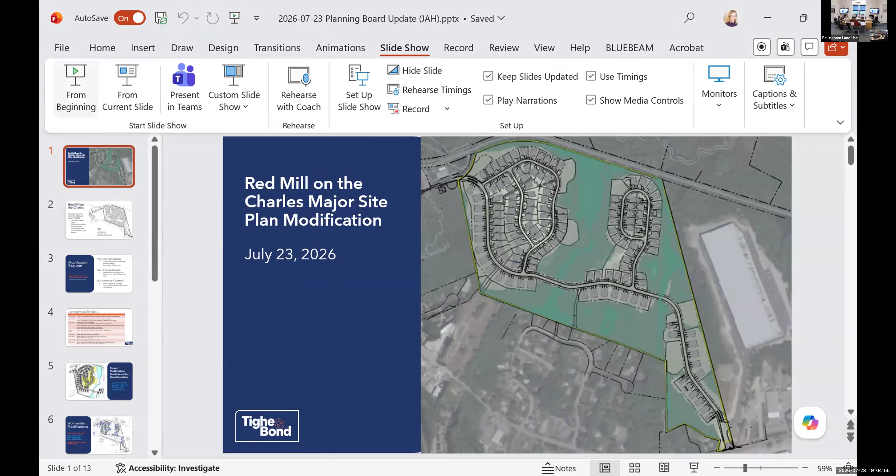As Jeff mentioned, we're just going to do an update on where we've been and how this process has started. This is the Red Mill on the Charles. It's a major site plan modification. The project was initially approved back in 2021. Since then, Toll Brothers has become involved, and to accommodate their preferred home products as well as modify the construction schedule, we've worked through a few requests on the conditions as well as some tweaks to the layout.

The permit was approved back in September of 2021. The project is for 105 single-family homes, 66 townhomes on 85.6 acres. The site has frontage on Mechanic Street, Route 140, and Mill Street. Currently it is an active gravel yard. In this portion, right around here, there is active earth removal going on. The project will preserve about 45% of the total property as open space. Those are the areas shaded in gray, totaling about 38.4 acres.

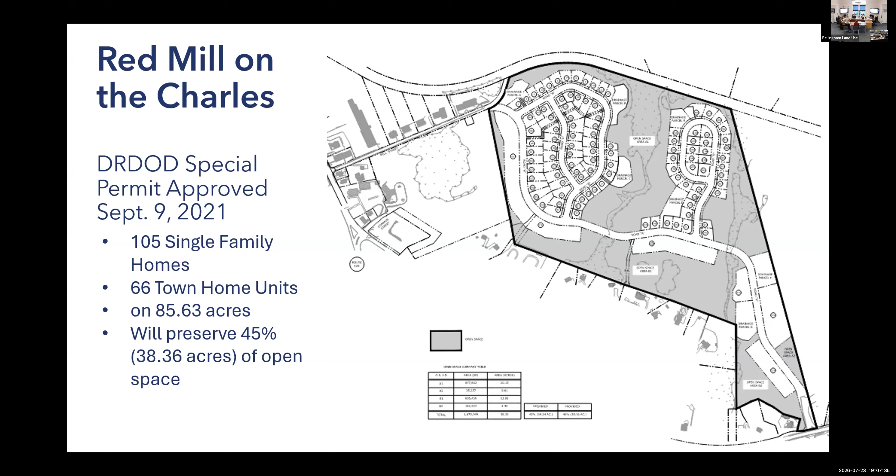So, modification requests. We initially came to the board back in February, discussed if we were going down a minor or major path. We voluntarily opted for the major path after meeting, and submitted our application in March of this year. Our modifications include a lot reconfiguration and a little bit of roadway alignment on two of the roads, adjustments to the stormwater management system, and then permit amendments related to phasing and occupancy, as well as the garage facade placements. We obtained a ZBA variance back in February.

This allowed the project to convert from having triplexes in those combined parcels to duplexes. It was just the way the regulations were written - triplexes were allowed and duplexes were not, so we got a waiver on that. And then we also got relief on front and side setbacks related to those townhomes.

Now, this is just a timeline of what we've been doing since November. We started meeting with the previous town planner and assistant town manager to discuss our potential permitting paths in November.

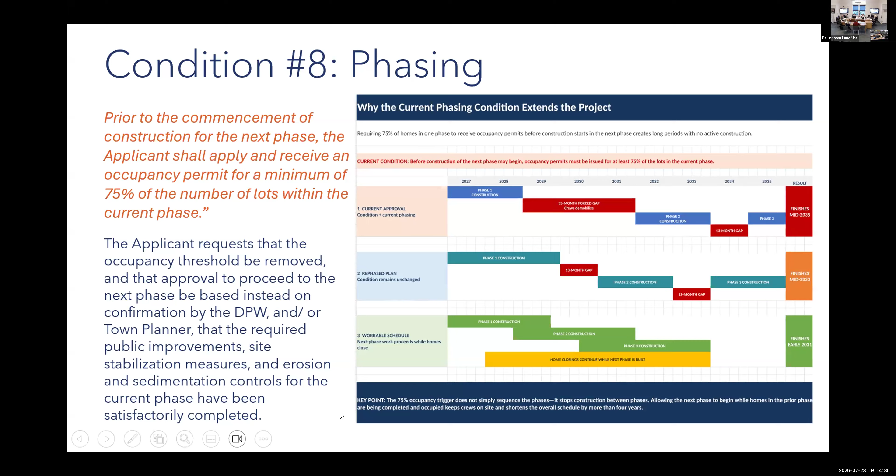If I can expand upon that a little bit—if you could bring up the spreadsheet that we submitted, that's the backup for this chart. So there's 2 different home types here: there's duplexes and there's single family homes.

What we're looking at here is the lag on either home type, because there are two different markets. Just because we have duplexes available to sell doesn't mean everybody who was going to buy a single family home is now going to buy a duplex. It's two different markets, two different price points. While we have duplexes for sale, single family home sales may be completely stalled. That's where you see this significant pause in that long red line - there were no single family homes being sold at that point. We could only be selling duplexes.

That's based upon the current phasing plan and the current condition as it's written. When we met last May, we had offered a different phasing plan. If we kept the conditions the same but followed that phasing plan, we would still see a one year gap between phase 1 and phase 2. So what this does, really, is what Liz was saying - everybody would demobilize, we wouldn't be able to sell or construct homes for about a year, and our entire construction team would need to leave, demobilize, and then come back onto the site later.

What ends up happening essentially is when you look at this gap schedule... I don't know, let me zoom in a little bit.

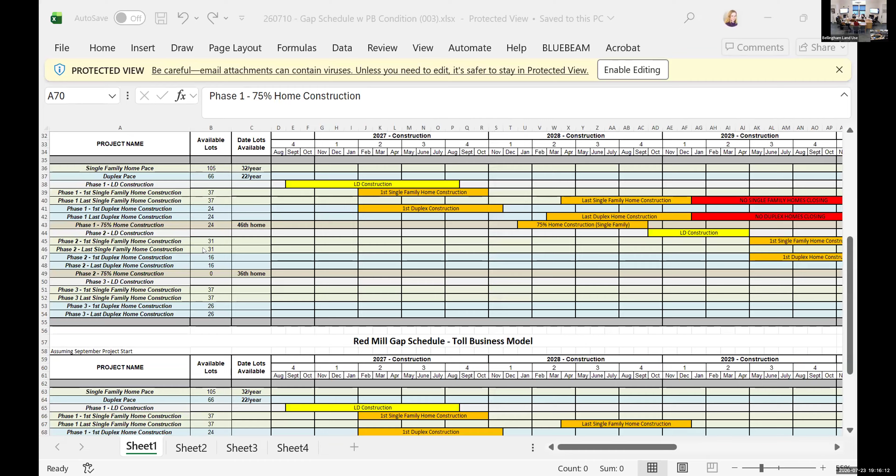What happens when we look at this gap schedule - under the current condition, if we were able to sell at what we would expect our pace to be, we would be finishing in mid-2035. Even with the revised phasing, if the condition remained as it is, we would be finishing in mid-2033. So that's the genesis of the request to modify this condition.

We can get into the details of this further if you'd like, but I wanted to point out what we were looking at in modifying the condition would move us down to that third phase, where we would be able to finish in early 2031 at the pace we would like to move forward at.

It sounded like there were concerns based upon other subdivisions in town. I wanted to walk through a little bit of the protections the town already has built into the permit, that we think provide the board some assurances that we're not going to disappear, that we do need to finish lots, and we do need to take care of drainage.

If you could flip these slides, sorry to jump back. It's testing the strength of our... sorry, okay, we need some stress tests every once in a while. I'll get back to these. Here we go - this one? Hang on, it's gonna get there. Here we go.

As it stands today, there are six conditions already in the special permit that has been granted, which we think provide the board with a lot of protections. At any point you can come out onto the site and submit a stop work order. There's a lot of control you already have built into these permits that have been granted.

But I wanted to step one further, if you can go to the next slide - there's also a bond being held by the town, and I understand there's always concern about being able to access that bond. What I'm suggesting is we come up with some sort of deposit that goes into the planning board's account. I used $50,000 as the starting point for that conversation, so that if we aren't acting in your interests and you have concerns, we have 7 days to rectify whatever has gone wrong, and you have access to this cash to do whatever it is to rectify the problem.

The reason this is such a big deal to us is we can't move forward with the project under the current condition - it doesn't work. Just because of the gaps, we can't operate that way. So I'm trying to find a way for us to move forward with a modification to that condition, and we can settle on a larger number if that makes sense. If this isn't used, we don't think it'll be needed - that's why we think it's reasonable to suggest this as an additional condition added to the special permit.

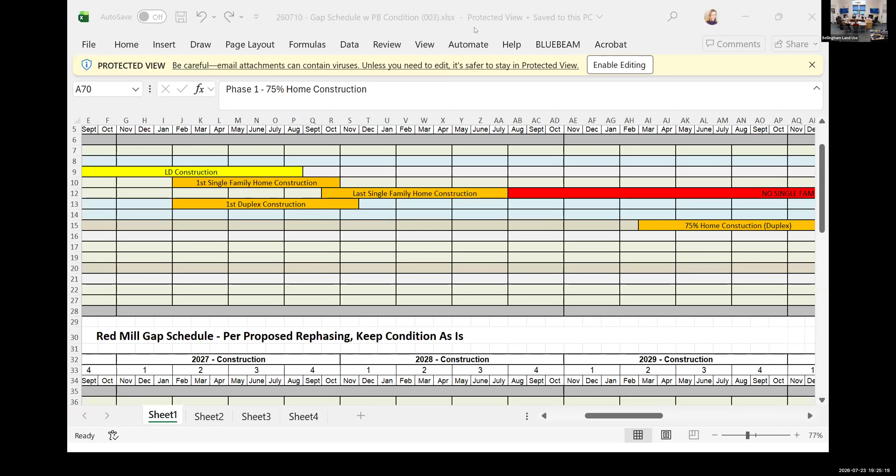You're building it and then you've got marketing time - is that what the downtime really is? So this is why we're waiting for the owner to move in. If you build 10 and start selling those 10, you get to the point where your phases - you're building up the phase, you're selling them off as you build them. So I'm missing why there's that large period of time where there's no building happening.

So if you use your 10 as the example. What was going to happen is we sell 10, and then we are building them. And now we have no sales going on. We have to wait, because we need that

75% occupancy. We need that 7th unit occupied. Now that we've got that, well, 8th, we need that 8th unit occupied. Once that 8th unit is now occupied, I can come back out, I can now start selling again, and I can remobilize everybody and start building that next home. But for a period of time, it takes a year to build a home.

A year, 14 months, depending on the home itself. We've got a year, so I'm building all 10 homes, even if I were able to sell all 10 at the same time and start construction on all 10 at the same time. Once I'm sold out of this phase, I have to wait till the 8th one is occupied and has a CO. So now I've waited that year before I can start my sales on my next one. So that's why all that downtime occurs.

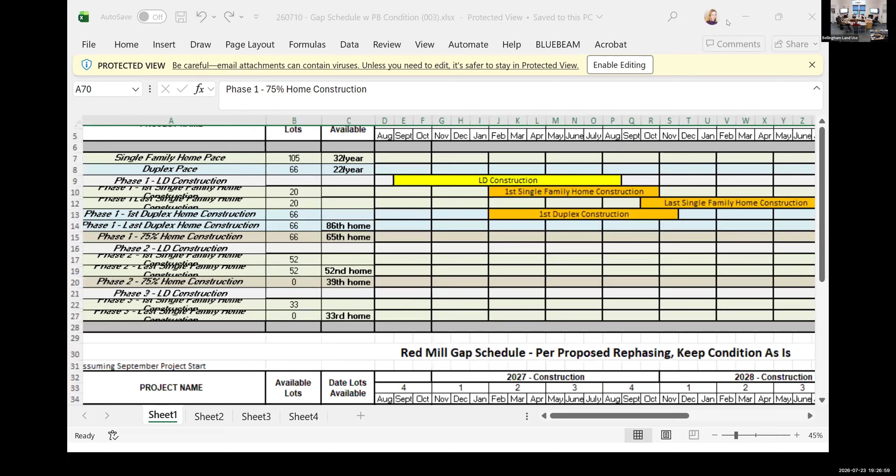No, based upon the phase, if you zoom in, in each phase the top portion is the single-family homes, the lower portion is the duplexes. That's why that very long red line is there - that's when the single-family homes, we have no single-family homes that can be sold because all the duplexes are in that phase. So it just creates this long duration where we have to wait till we've sold and constructed 66 duplexes.

And once the 75% is occupied, then we'll be able to start selling the next single-family home. Do you need additional phases to get that 75%? That would make it longer.

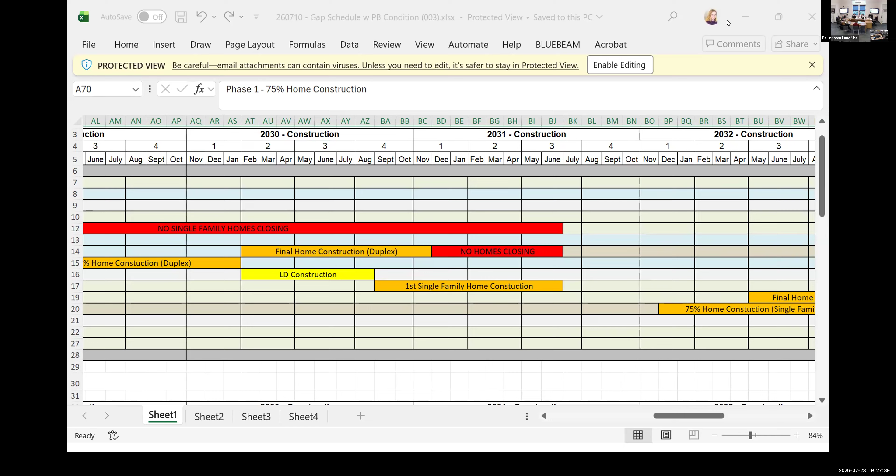So can I ask - maybe you know Phil better than I - based on what they're proposing, what would be the reason why we wouldn't allow something like that? Because at the end of the day, this is going to shorten the whole project. So there's pluses and minuses, and given that the entire project can be shortened by doing what they're proposing, what's the downside of letting them do that? Because I don't know what the downside is.

The downside is if we run into problems, the town doesn't have enough teeth to actually enforce what it needs to enforce. $50,000, like you were suggesting, is - were you just throwing that number out? Even if it was, what's the average selling price of one of your houses? What does that have to do with it? We're talking about teeth in the process - you have a stop work order.

Also, I guess, why - within your subdivision regulations there's a calculation for coming to a surety. So that's still in place, correct. This is just $50,000 that the town can easily access outside of that. The concern that was expressed to us was that we didn't want you to move into the next phase because somebody may be living there in the first phase, where stormwater management may not be fully completed, there may be a stockpile left behind, trash may be blowing around. These were the concerns, and that's where the $50,000 comes in.

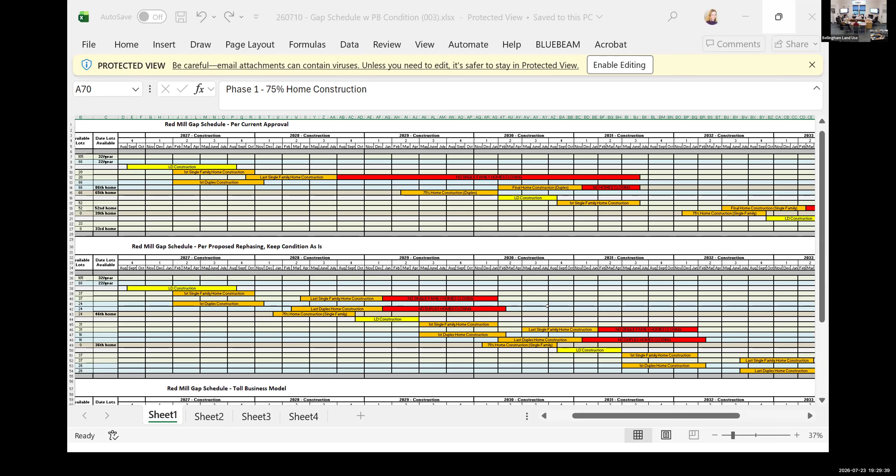The idea is, the concerns were that we weren't doing our job protecting the homeowners that have moved in. So what could be going wrong out there that we need to have repaired? And this cash would be used to mitigate any issues with the homeowners there - is that what you're saying? Correct.

Yes, and if we had to mitigate any issues and we use that cash, then what? We can be required to replenish the account as needed.

I'd like to hear from the Inspectional Services director, I believe we've got a new director there who would be in charge of monitoring this project. We're not gonna make a decision tonight on this, and I'd like to hear them weigh in.

Is the phasing as originally proposed beneficial for the town or not? I want to know if this is something that we can do, something we can even consider. Okay, thank you for the question.

So in previous communities that I've worked in, we've had peer review services to sort of be like a clerk of the works, to oversee, be that special project manager for that project.

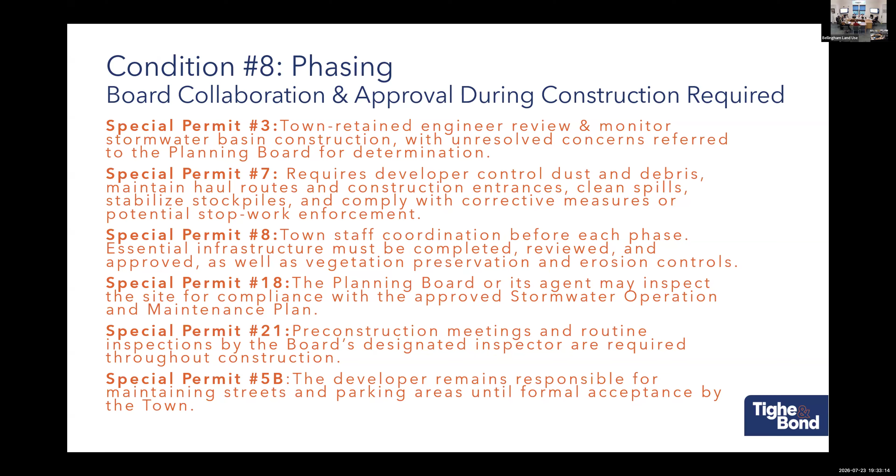Because of the way the phasing is set up with the single family and the duplexes, and you mentioned the roadways are gonna be 100% before you even do your first phase. We would do the roadways at the beginning, that's correct. So that's almost phase 1, roadways and drainage. Yeah, so what we've done is we've included those roadways as part of the first phase, that's what's in gray.

Which you never see, that's the benefit of being Toll Brothers. Oh, okay. We're here for the whole job. So it makes sense for us to build it out. Yeah, that's usually the thing I see, you see them where they stop and you're like, oh interesting, they may just leave. So that's one thing I noticed when I was looking at it, it's not something I've usually seen. Kudos to you on that.

Just remind me, what were the second and third colors? The green was the second phase and the blue was the third.

So then what's the next step, Marty or Phil, on moving forward looking at this the way that they're proposing? For me, I'd be in favor of working with them to do what they're proposing because it shortens the cycle of getting everything done, and they seem to be wanting to work in good faith. To Rachel's point, they're doing the roadway as the first phase, which indicates they have every intent to build out everything. So I'd like to see us find a way to make this work rather than a way not to make it work.

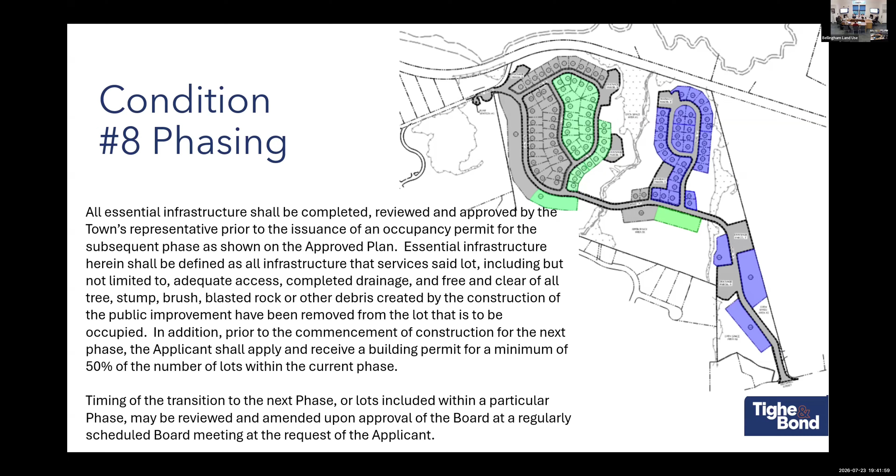Would anyone want further conditions on the $50,000? I know that's above and beyond already, but when you're working on something this large, $50,000 can go very quickly. I understand there's a bond, but we could condition it so that it has to be replenished. Yeah, that's almost kind of what I'm thinking. Yep, that's fine.

We want to move on to the garages, the cookie cutter issue. The idea from the prior board, the former vice chair, was looking to have more character in the neighborhood. It was basically to say, if all the garages are lined up, there's not as much character. That was the philosophy.

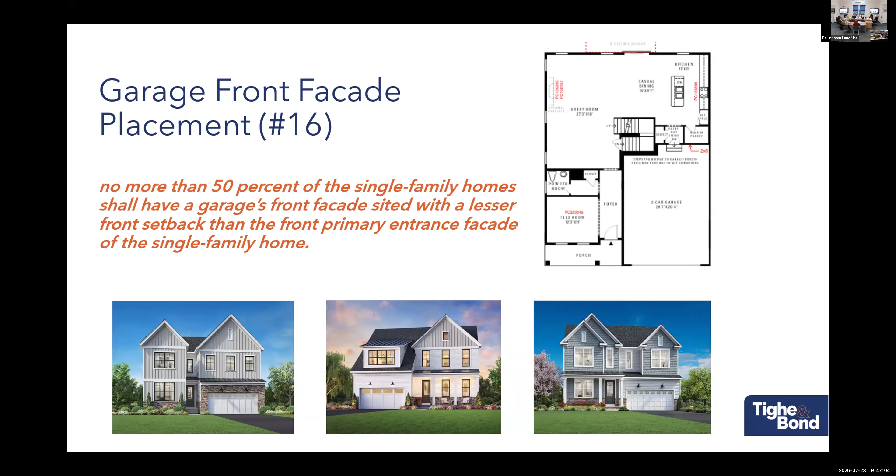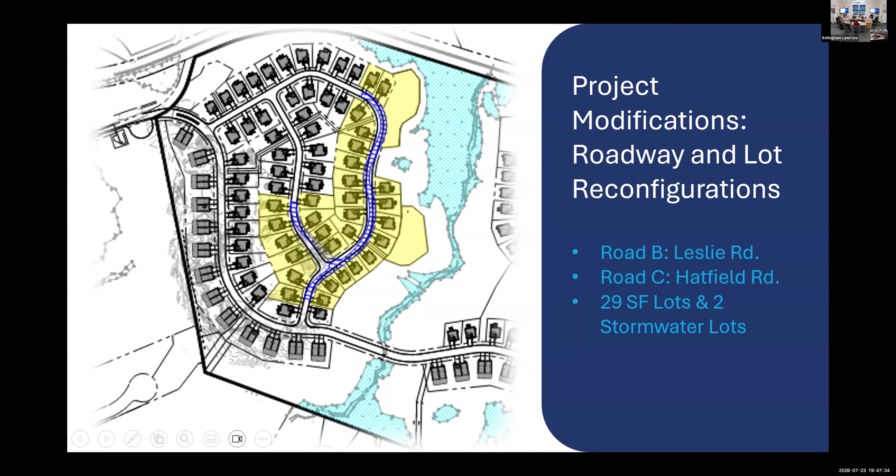Is there anything left to present? I was gonna ask if we wanted to go through stormwater or the lot modification. We do have Beals and Thomas, Tom Micklack, here who reviewed this. Why don't we do a peer review for stormwater? I know you guys have been going back and forth. Can we pull up the letters? I certainly don't have it memorized.

I'm going to be familiar with the stormwater then. Yeah, she's bringing it up over there. Right now. The letter from July 15th.

So we have done, this is our second round, our second iteration, so a lot of comments have been closed out or are now deferred to the board.

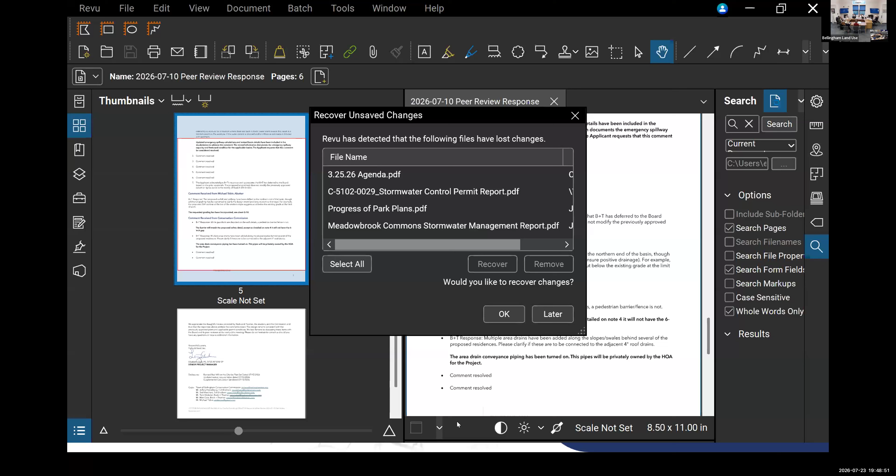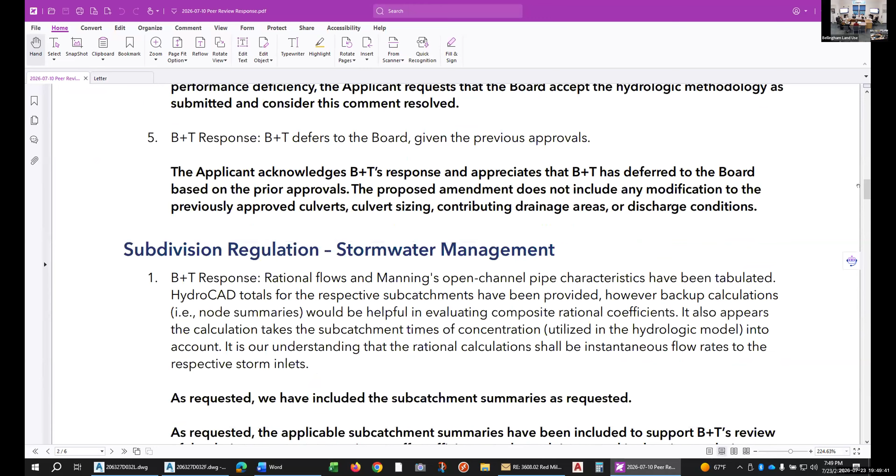Um, be frozen, apologies. I don't know, Tom, if you would have more success sharing. Sure, I can share. You want me to share the letter with you, the responses? Yeah, I think that would be helpful. Okay, I'll stop. I don't know if everybody can see that. Yeah, yeah, that went quick. Way faster than my hotspot, so thank you. You're welcome.

So yeah, to Liz's point, this is our first supplemental peer review. We have gone back and forth, and to that end, a lot of the comments have been addressed. So you'll see here, you can see comment resolved. I don't know if we need to go point by point necessarily, but there are a lot of items.

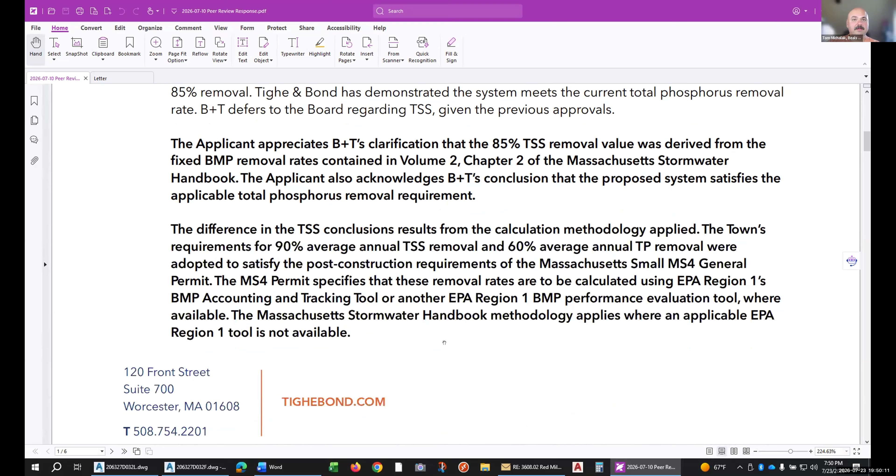There's a handful of items too that Beals and Thomas, we made the initial comment, reviewing things against the current procedural rules and stormwater regulations, and regulations that weren't necessarily in effect at the time of the original approval. And Tighe & Bond responded accordingly. So there are comments here where we basically deferred back to the board, basically saying, making the comment just for the record that, okay, the current standard is this, though we acknowledge that the approval back in 2021 might not have been subject to the same regulation.

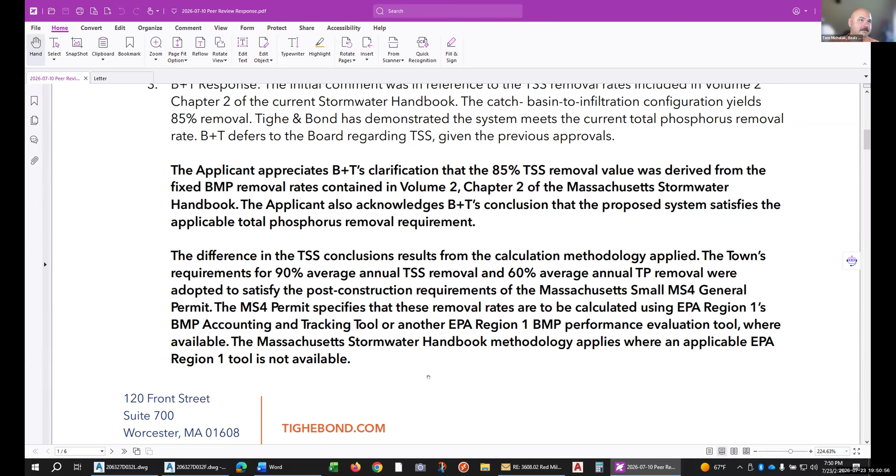There are a couple of items that were still hanging out there, and Tighe & Bond, we appreciate that they responded and provided their rationale for these things. One of them was this right here with the TSS, knowing that the town has a regulation for 90% removal. We basically made the comment that it was only 85 based on the handbook and the stormwater spreadsheets, or the BMP spreadsheets.

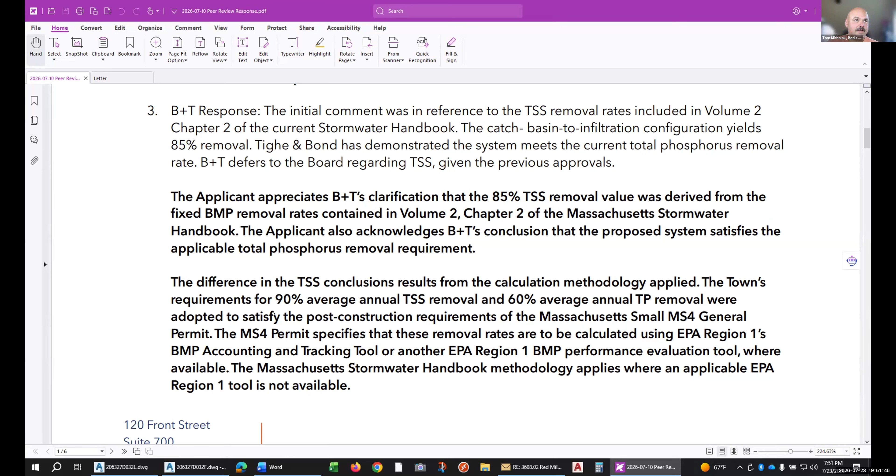But yeah, certainly with the MS4 permit, and given that the town regulation is written through that lens, and the forthcoming stormwater handbook or management policy will also have these regulations, we basically agree with the utilization of these BMP accounting and tracking tools for the TSS. So I think this one right here, number 3, that's effectively addressed.

There are a couple other ones here, and just to go back, let me see here. Yeah, so these are ones that we deferred back to the board on, and Tighe & Bond basically just providing their rationale.

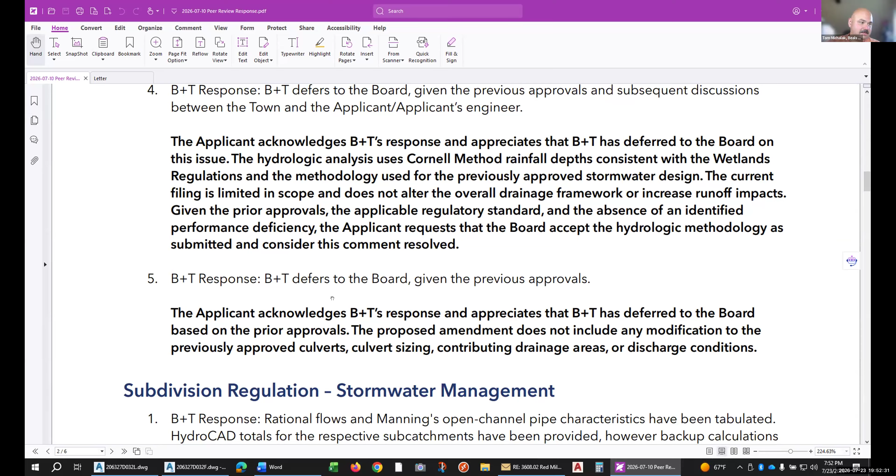The culvert sizing, this is another instance where we made a comment on something that we weren't involved in the initial review, but we made the comment without really acknowledging that these things weren't changing. So that was effectively Tighe & Bond's response there.

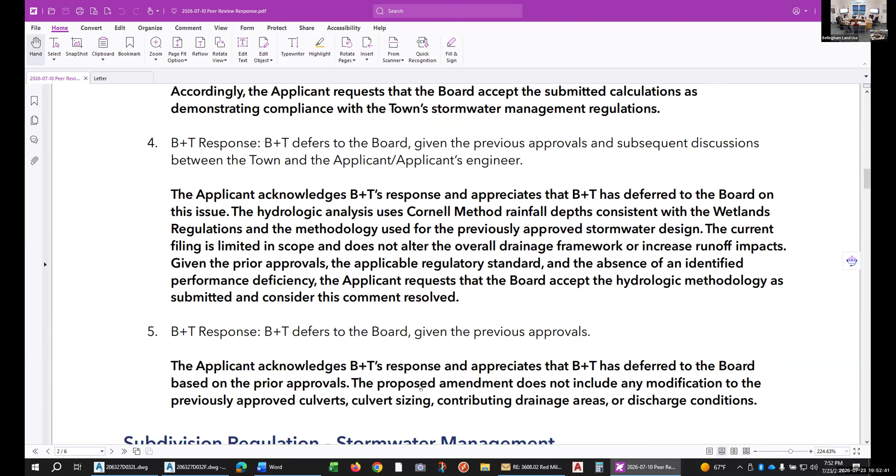Was that based upon the MS4 changes that went into place? Is that a lot of these, or is that? Yeah, I mean, I think the new regulation is a higher standard than was originally approved. Is that correct? That's correct. And we're changing the stormwater methodology right now. Is it, so why would we not enforce the new regulations? We meet them. Well, meet them.

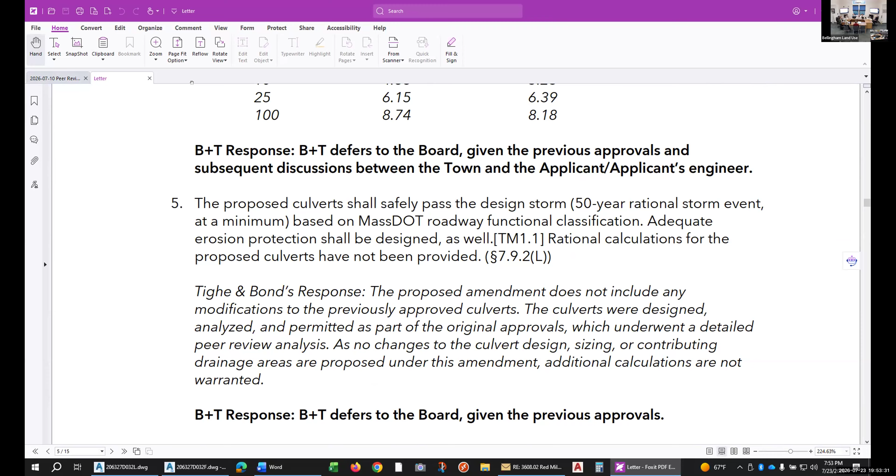Yes, so the new regulations from MS4, it's really focused on treatment, right? MS4 is focused on making sure that we're fixing a broken system. Stormwater was initially designed hundreds of years ago, 100 years ago or so, where we just thought about it as flooding, right? Get the water away. Now we're seeing in the 303D list, which is issued by DEP and tracks the quality of our waters, that stormwater is one of the leading pollutants in the state and the only one we're seeing growing. So the MS4 permit is stepping in and saying you now need to treat.

It's coming out with this 90% TSS removal calculation and then the 60% total phosphorus, and we do meet both of those. The differential that Tom was talking about before is that the 2008 stormwater handbook assigns pollutant removal just per stormwater control measure, meaning if you have an infiltration basin, you get 80% and that's it.

The EPA has since released pollutant removal curves to support the MS4 and the communities implementing the bylaws to apply. It acknowledges that an infiltration basin getting 0.2 inches of treatment achieves less pollutant removal than one getting 2 to 3 inches of infiltration volume. So we applied the current curves issued by the EPA, which have also been acknowledged by DEP and will be in the Resilience 1.0 package, the updated stormwater handbook, when it finally comes out. Per DEP's update just last week, it should be by the end of the year, but it's an election year, so we will see.

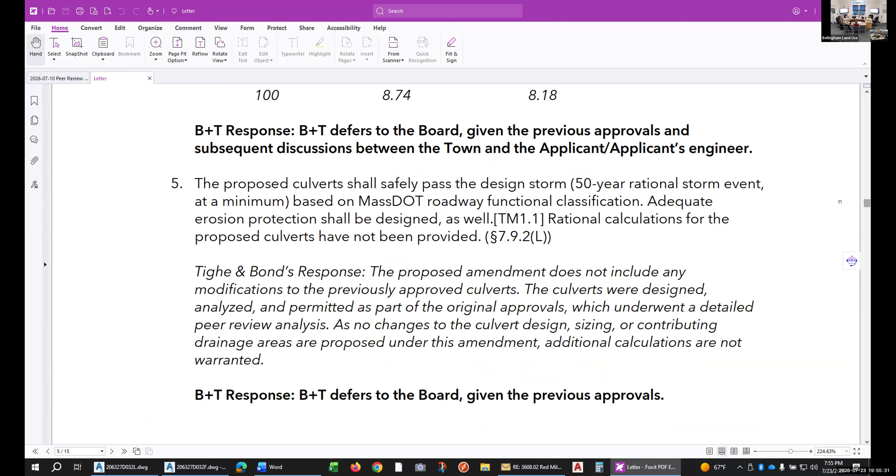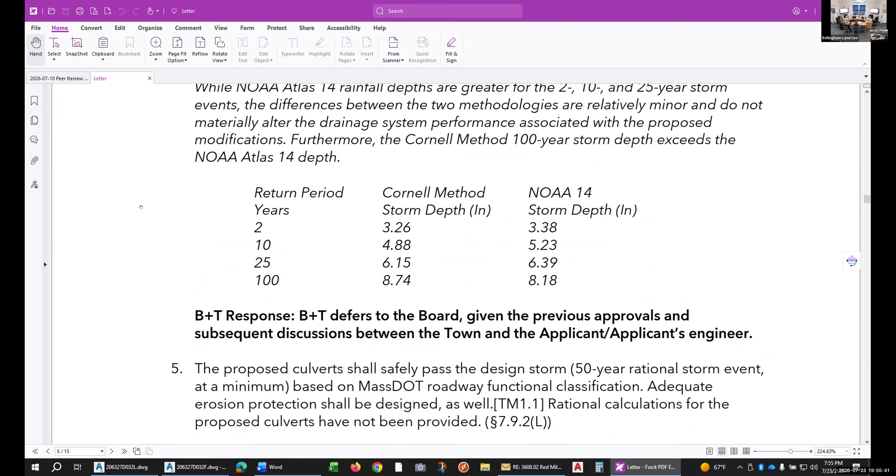So we're at 90% TSS and 60% phosphorus. The only place we ask for relief is that we did not change the storm depths used to design the system. That table, just off the page there, shows the 8.74 and the 8.18. The town regulations defer back to what is called the Cornell method.

We used to think the Cornell method was the best and most available, but it's really only based on about 80 years of data. NOAA is based on over 100 years and has federal funding to be continuously updated, so once every 10 years we'll see an update to NOAA Atlas 14. It's now considered the standard that everyone points back to.

So we are detaining more in the 100-year. It's like a 0.1 inch difference on the 2-year, so it's kind of inconsistently all over the place, I'd say. But we are detaining more on the 100-year and around the same on the 2-year. I think those are two big driving factors, given that 90% of storms in Massachusetts are 0.8 inches or less. And then the 100-year would be like a forward-facing storm where we're now actually above and beyond the average depth NOAA is claiming, more into that climate-change-ready scenario.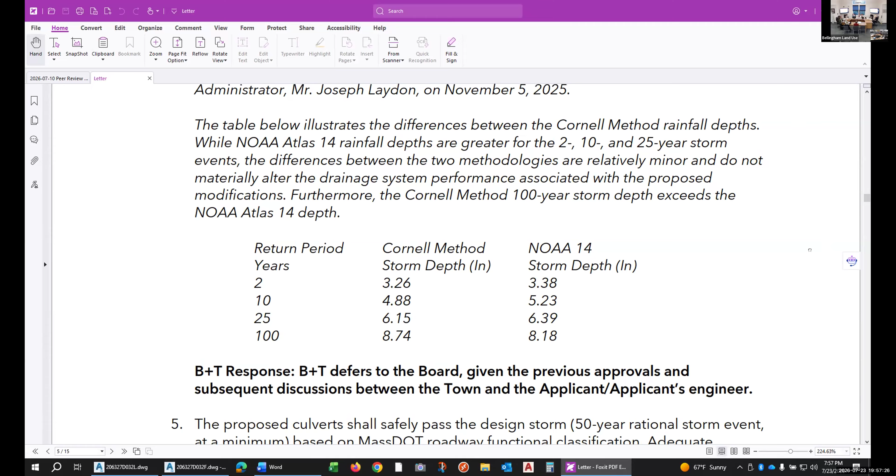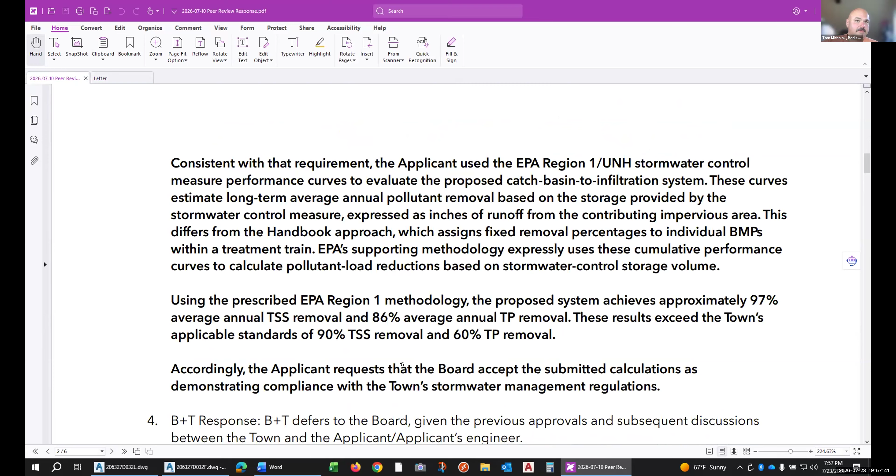Tom, I didn't mean to cut you off. No, that's quite all right, and I appreciate the background there, Liz, in context.

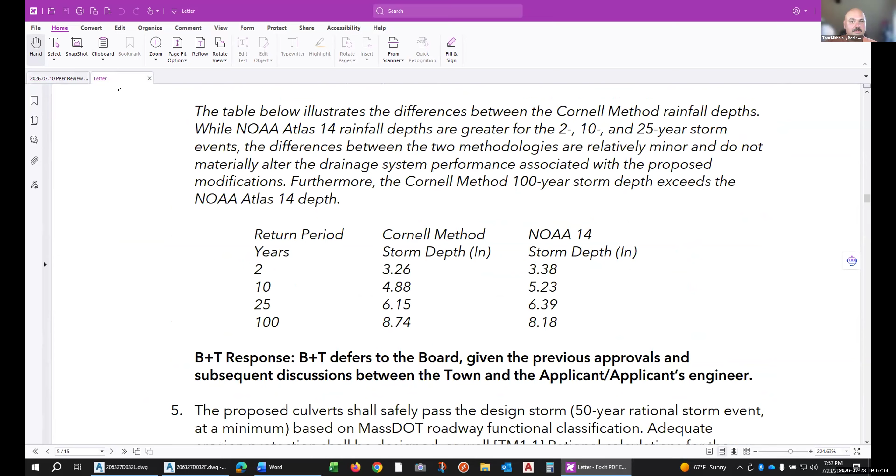But that was certainly one of the other comments we made there as far as storm depths. I think the one regarding the culverts, we didn't see rational calculations for those, and my disclaimer here is we haven't dove into the most recent set of resubmission docs that Tighe & Bond sent over. We've exhausted our supplemental peer review, so to wrap things up, we'll be looking for additional services.

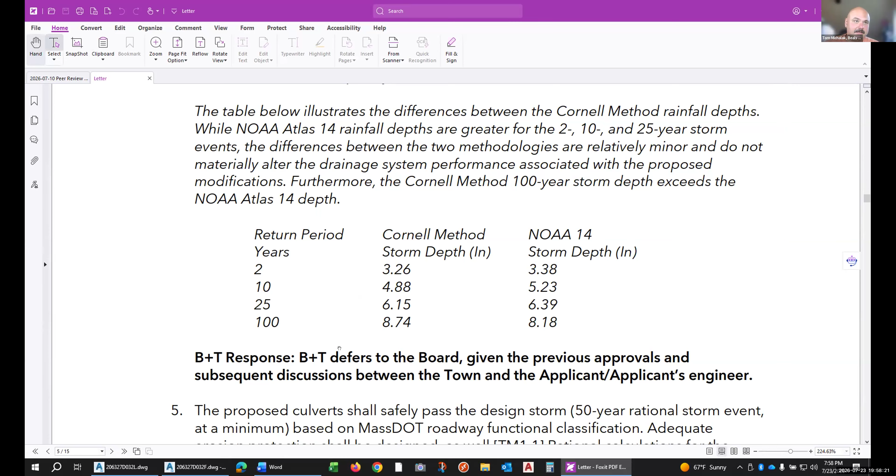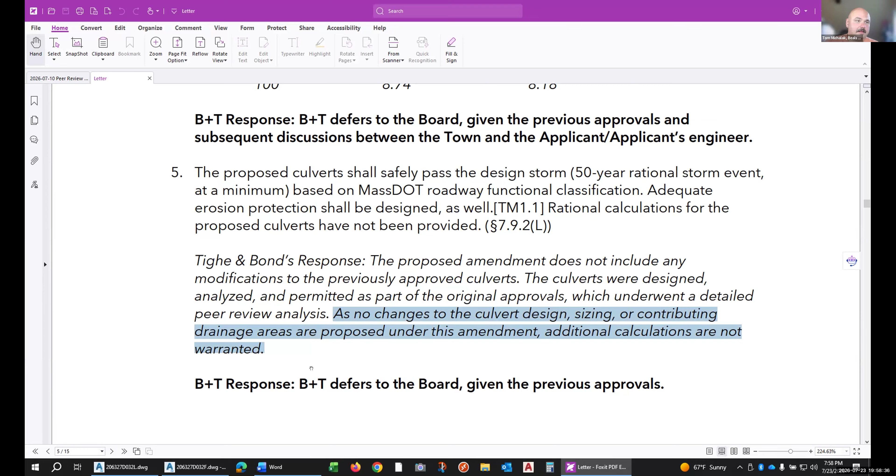Once we get into that, we'll be able to vet out all these other items. But to that end, this is one here where we asked for the rational calcs, and I think Tighe & Bond's response was that nothing had changed from the previous approval, so additional calcs weren't warranted. I don't know that they were included, but that's something we can sort out.

Rational flows. Yeah, and there's a comment here about utilizing HydroCAD for the rational calcs. That's just something we were more accustomed to seeing as a very simplified calculation for the rational calcs.

HydroCAD, and Liz, we can talk offline about some of this, but partly some of my questions from the last set of calcs we reviewed was that there are some subcatchments not generating any runoff in the HydroCAD rational calculation, understanding it's pervious areas potentially directed to culverts or area drains, whatever it is. I was just trying to reconcile that with what we're generally accustomed to seeing, which is that instantaneous rate of runoff, which can understandably be conservative, but is the industry standard for a lot of these things, especially storm sewers in the roadway where it's all pavement.

So, I know that just given a cursory look at the info you guys resubmitted, there's an updated calculation in there, or additional info that I requested. I can't remember if it was the HydroCAD summaries, but that's something we can take a closer look at and coordinate on.

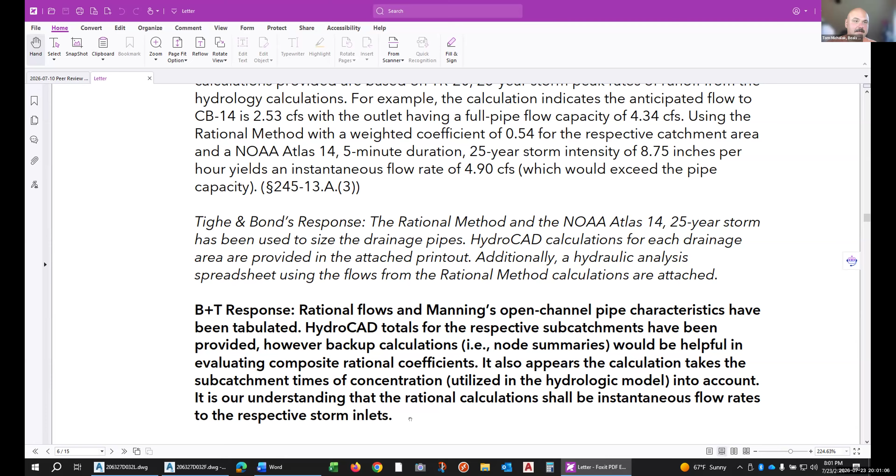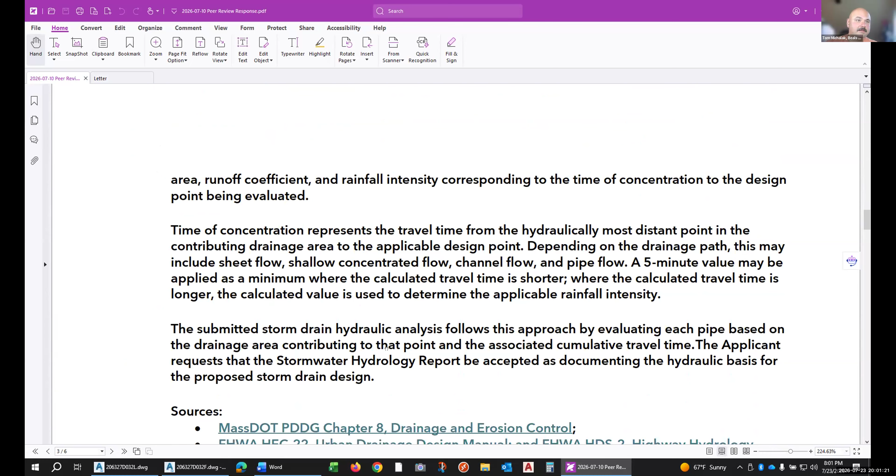I think a lot of these other ones, and this is our letter, but apologies to switch back and forth, I don't want to confuse everybody, but back to the Tighe & Bond letter. This is a response to that hydraulic discussion I just talked about.

It looks like this was another comment we had about the basin grading, understanding there was a waiver previously granted, but at this specific basin we felt it was worthwhile to at least make the comment, given the application of those slopes. It appears Tighe & Bond addressed that, and we can check that out as we get into the second supplemental review.

This is another one that we deferred to the board on. Can't remember the exact comment, but...

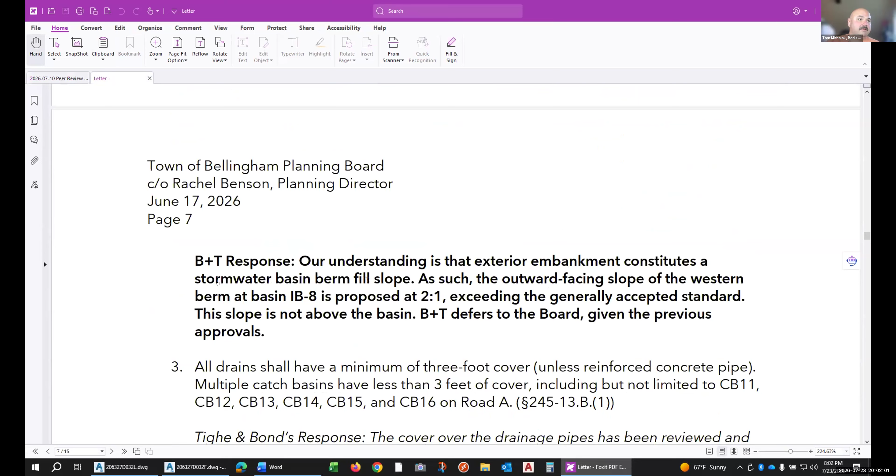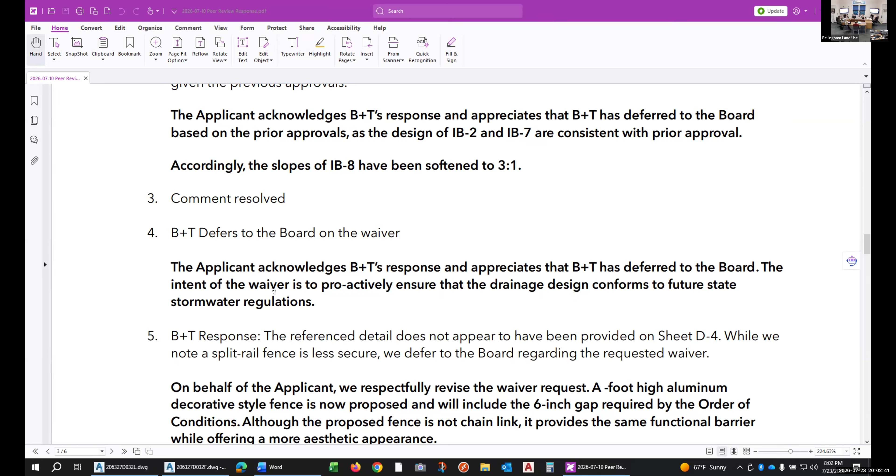Well, the fence might be worth updating you guys on. So we had submitted a waiver to do a split rail fence around the basins. Heard the feedback that you guys weren't comfortable with that and didn't think it would meet the safety requirements that the regulation is trying to put in. So we are still requesting a waiver, but it's just because we're not doing chain link. We're going to do a solid slat fence, just because it's a little more aesthetically pleasing. And we do have the required 6-inch gap at the bottom because the Conservation Commission does want to allow critters to be able to go through.

So I think we're much more on the same track where this will provide that safety requirement that the board was looking for. Do you have pictures? It's in the plan set, but I need to find it. Towards the back on the detail sheets, but what number is it? I'll go get it.

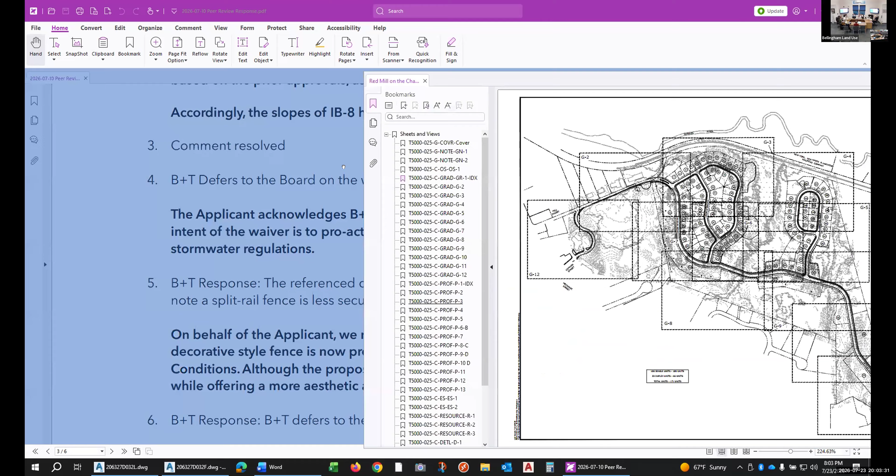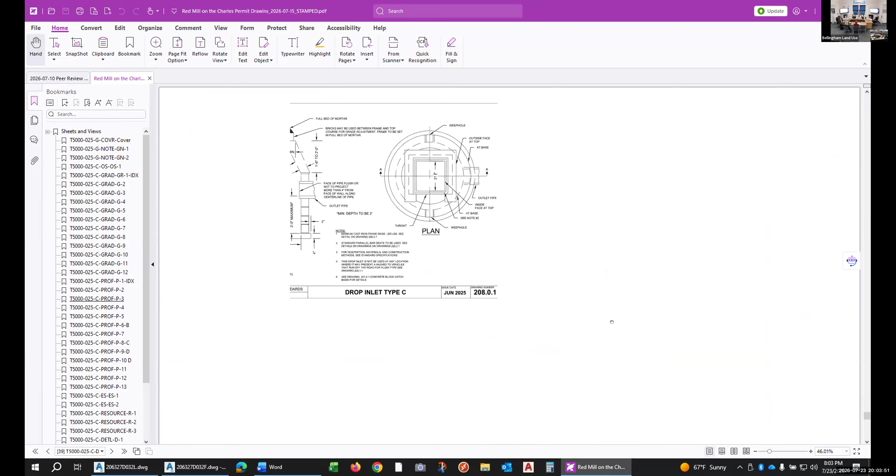E18. What page was that? D1B. This set doesn't have it, he's done. On this set it's not in. D6. Yeah, this is right there, sorry. Yeah, there you go.

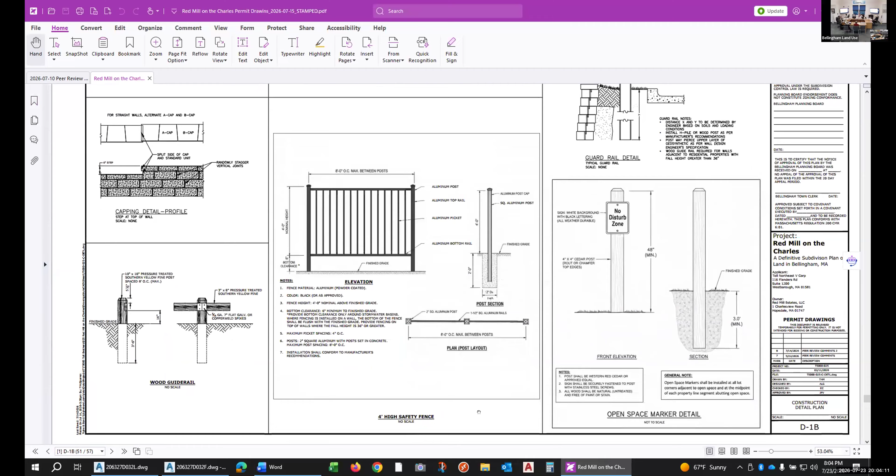So is that aluminum or vinyl stockade? It's aluminum. Oh, okay. So yeah, we just wanted it prettier. I like that. Yeah, I think it's an upgrade from chain link, so.

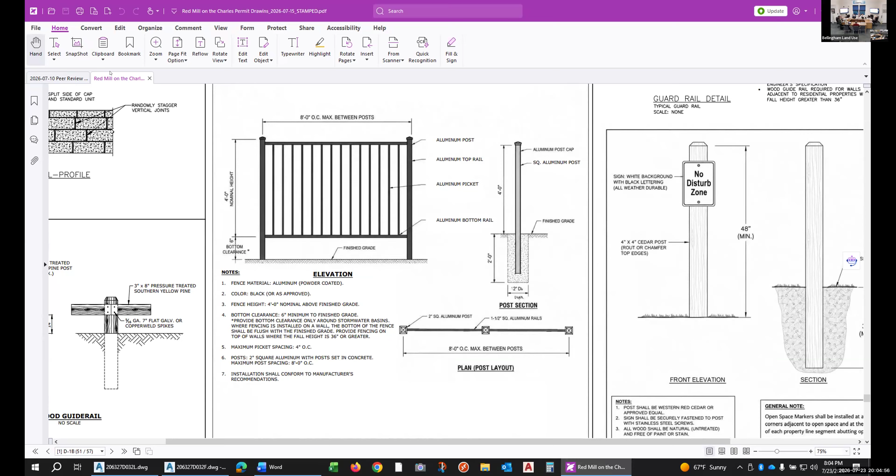What's the gap in between the rails? I don't think it indicates. No, we don't have a model type, I guess, to see what the gap is. We can follow up with the manufacturer and bring in an actual panel on wheels, turn it around.

Okay, any discussions on the fence? Has anyone submitted questions? Yeah, the only concern is you don't want a child going in there, I imagine. Right, well the 6 inches under the bottom is a requirement. But if you look at that drawing in scale, if that's 6 inches at the bottom, it's less than 6 inches between the slats. Yeah, if we get the manufacturer to give us the detail.

But yeah, that was included in the plan set. That's not in this package. That was the one where you had issues with printing at your office. So it looks like this ends at D6. Oh, no, well, for some reason D6 is at, I think, E1B.

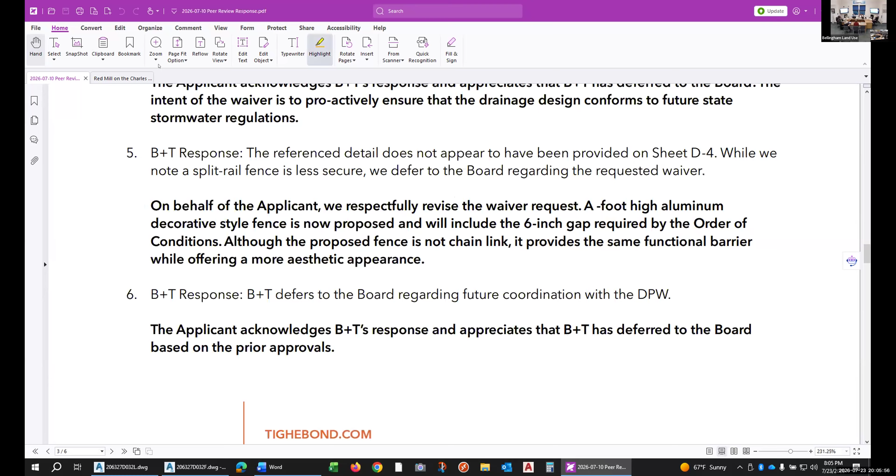Yeah, okay, E1B. There might be a little... Oh, 1B, I'm sorry, I didn't hear that, I said the wrong thing. Okay, E1B, D1B, thank you. I have a D1A. And then I have a D2, so... there it is, oh, it's right before D2. You're missing it? Yep, I'm missing it. Okay, it's not in your packet. I have a D1A, there's two of them maybe. Yeah, we had trouble with our plotters and printers that day.

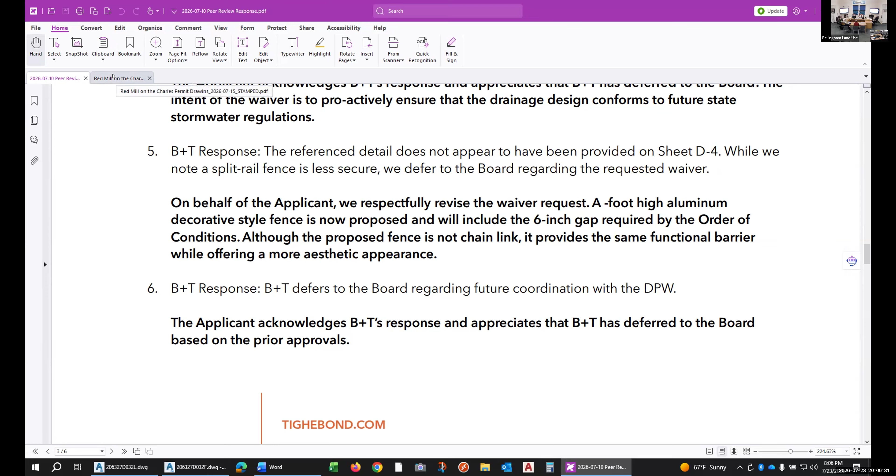Always when you were in. I was just thankful I had three different offices to try. Yeah, that's six, so that's less than. If that ties out, yeah, if it ties out.

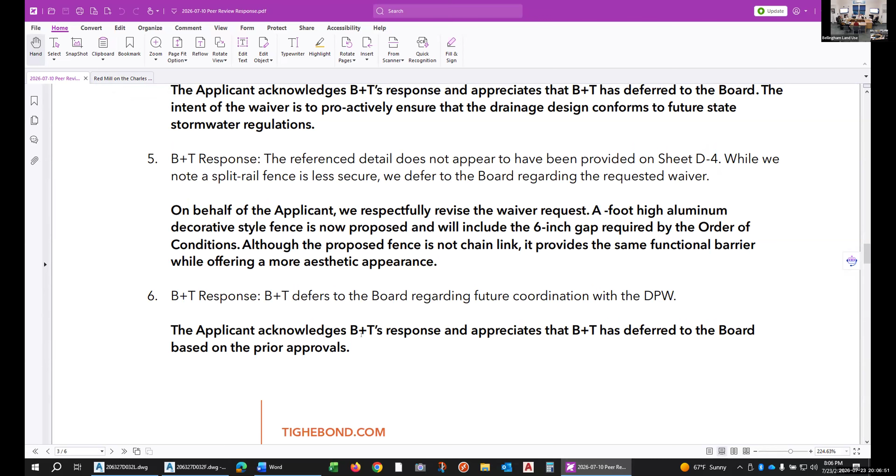Well, drawings are always scaled. They are, right? Okay, not the seal, that was good. Anything else? I'm fine. Do you guys have anything else to present? I think we've done enough.

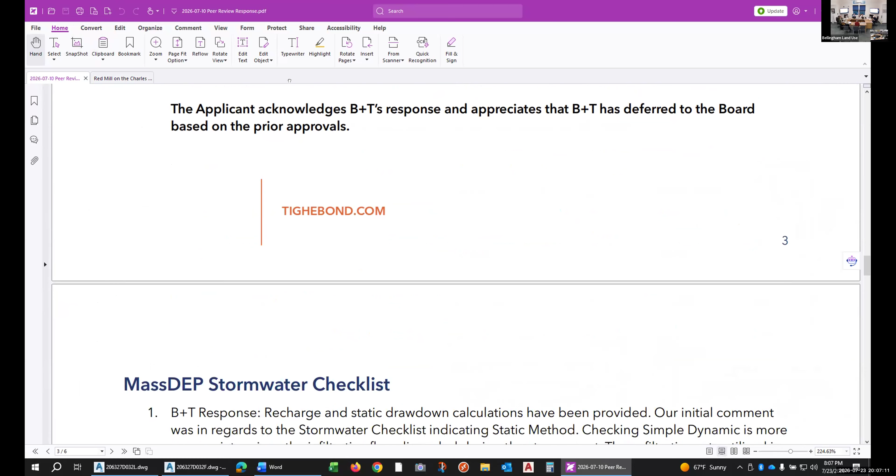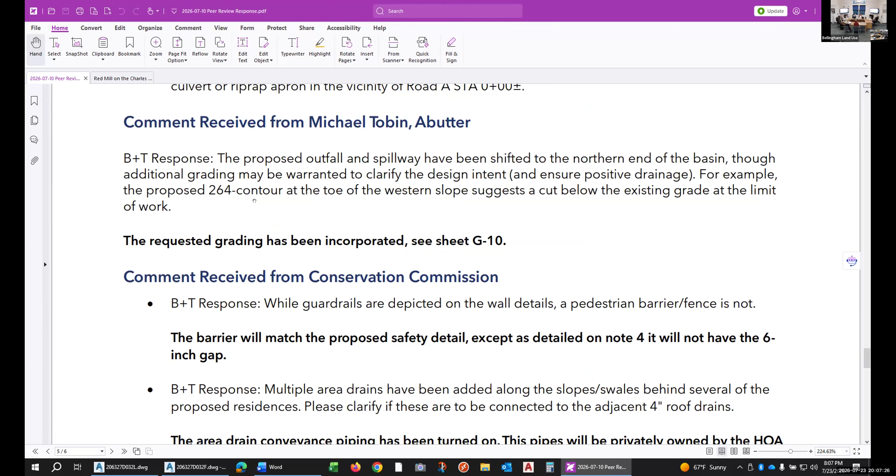I just want to know about the response to the abutter. Yeah, there was the abutter's concern, and what was the response to it? Maybe I'll pull the screen up for this. You want to pull up the screen, Liz? Yeah, that'd be helpful, thank you.

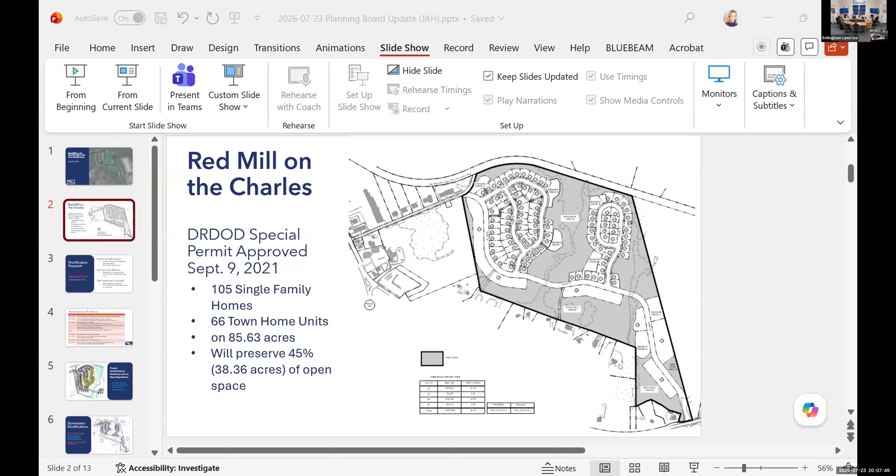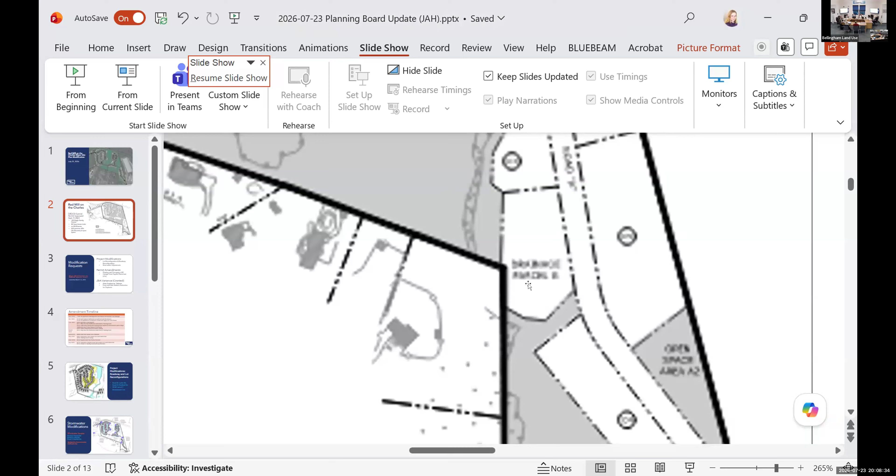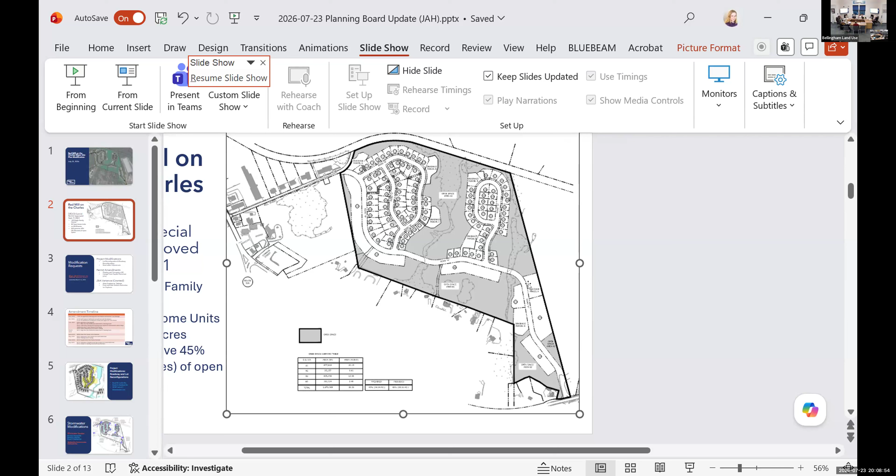So you had submitted the waiver, but you're going to have to rewrite that now with the aluminum, because you still have chain link on that. I'll rewrite it.

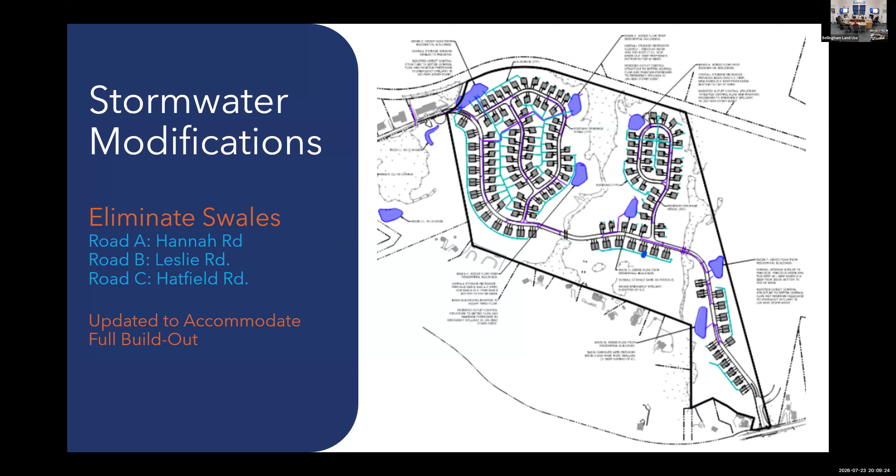Do we want to review all the waiver items in there? Okay. Or does anyone have any other questions for Tom at this point? Now, I know we need to do a secondary peer review on the response, but Tom, you had said you've exhausted funds.

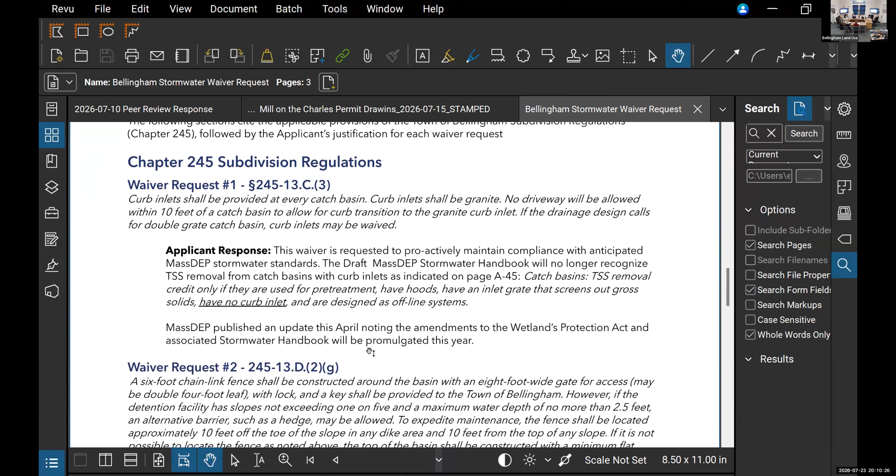Yes, we basically had the proposal through this meeting and the first supplemental peer review. So yeah, given what's remaining, we would need something to be able to go through and provide a clean letter, so to speak. How do we go about that? Well, I did speak to Tom and asked him to prepare an updated estimate for this last review. So if you could submit that, I'm sure they will fund it, and if there's not enough funds within the 53G account, let me know. Thank you. Sure.

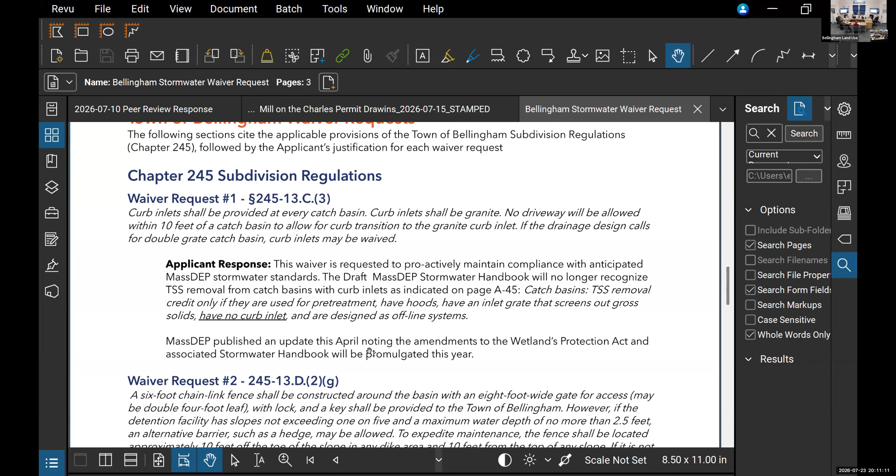Provide that, okay. I have the waivers up. So the first one we had talked about: the current regulations in Bellingham require granite curb inlets, that's a piece of granite with a hole behind it that drains into a catch basin. The Resilience 1.0 package that will update the state stormwater standards no longer recognizes total suspended solids removal from catch basins with curb inlets, so we're proactively asking for this waiver so the town can remain in compliance with future regulations. Doesn't seem unreasonable. I think I gave the citations on where it is in the handbook, if it wanted to be checked on the draft handbook.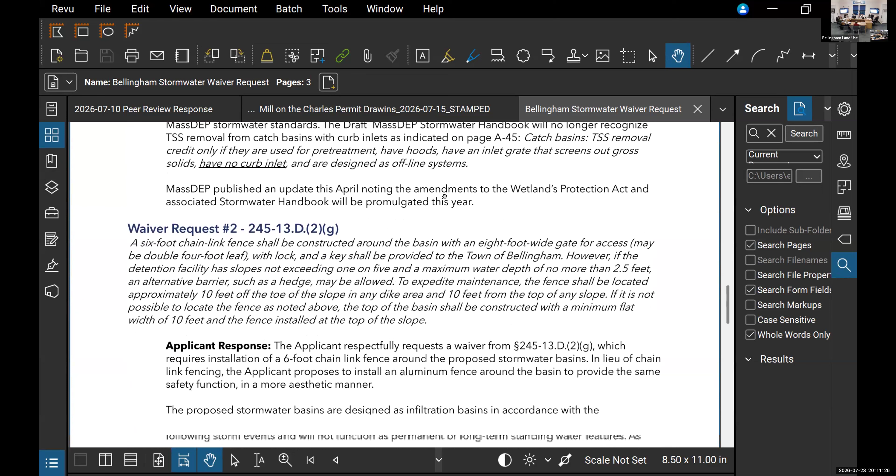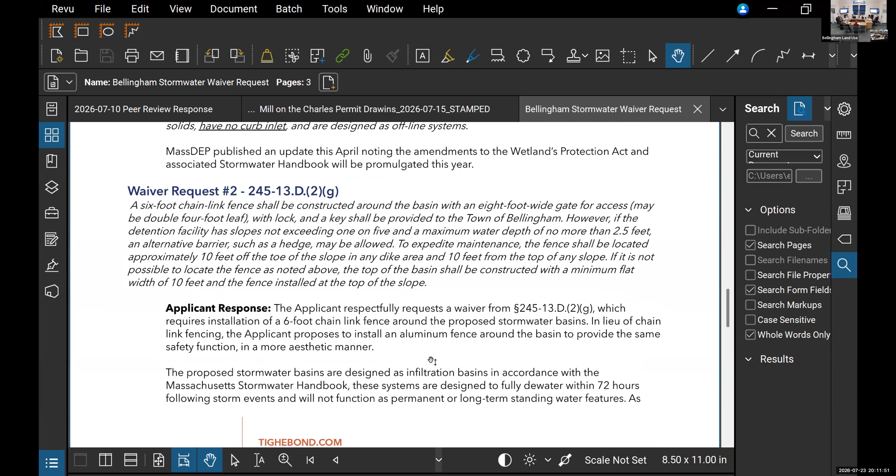This has been updated to request the aluminum fence around the basins to provide the same safety function with more aesthetic features. That's the waiver to the six-foot chain link fence, so it's just again trying to swap materials for aesthetics. And that's it.

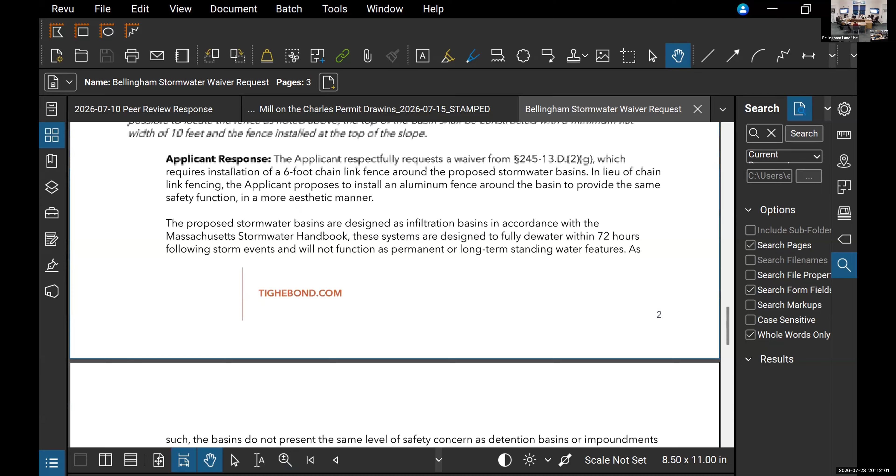Questions and concerns, anyone? I just want to make sure the fence, that the child cannot get through. With the 6-inch gap, I measured my 12-year-old's head and she could definitely fit through if she wanted to and turned her head sideways. I did a lot of research into this, after meeting with you, to see when and where and how often drownings actually occur in infiltration basins, because it was something I hadn't read through a lot. The American Society of Civil Engineers did issue a manual and a report back in 2014 on when and how this happens. A lot of it happens in Florida.

Where it is, a lot of times you have squishy sides with sediment, or overly steep sides. So we are adhering to the safety standards prescribed in that manual, because they are baked into the 2008 stormwater handbook.

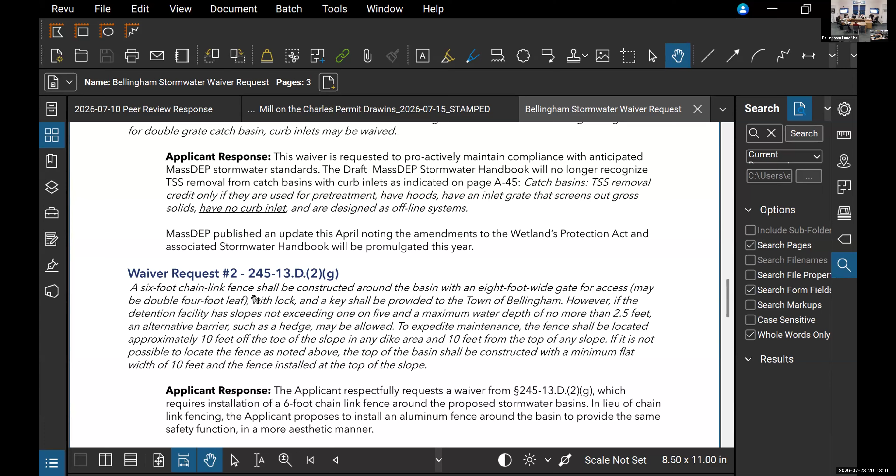So I actually meant a child can get through, not cannot. Yeah, because you just don't want the kid's head to get stuck. I know, but conservation wants it as well, for turtles and frogs and whatnot. Yeah, I've already had bunnies get stuck in a chain link fence and it's not fun.

Okay, so for our waivers, is there anything else we should be reviewing? Any other discussions? I have no other questions or comments. Okay, so I guess we wait for the next peer review, make sure everything's clean, get the appropriate verbiage added in terms of the phasing, the colors and scheming, and then the amount of monies.

Run that through town counsel to see that. It's not a difficult thing. So it's always good to have it. As long as once it's written in the condition, what happens is they submit that check as part of the condition.

In my previous communities, I provide the check when I'm depositing it, as well as a copy of the decision highlighting that condition. The condition also states what that money can be used for, so that is on file with the accountant, treasurer collector's office. So they know when I'm submitting a check or DPW is asking for money out of this account, they double check that it's for what the condition stipulates, not for paper or something completely unrelated.

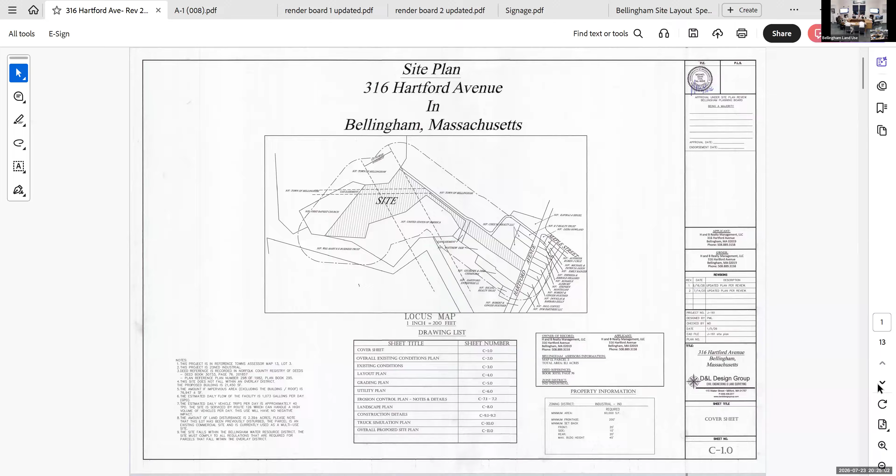Does C1.0 represent the fire chief's updates? No, this is an updated plan as of the peer review, dated July 14th. The meeting with the fire chief was on the 16th, so we have an updated plan, but before finalizing and presenting it, we were waiting on the response from Beals and Thomas.

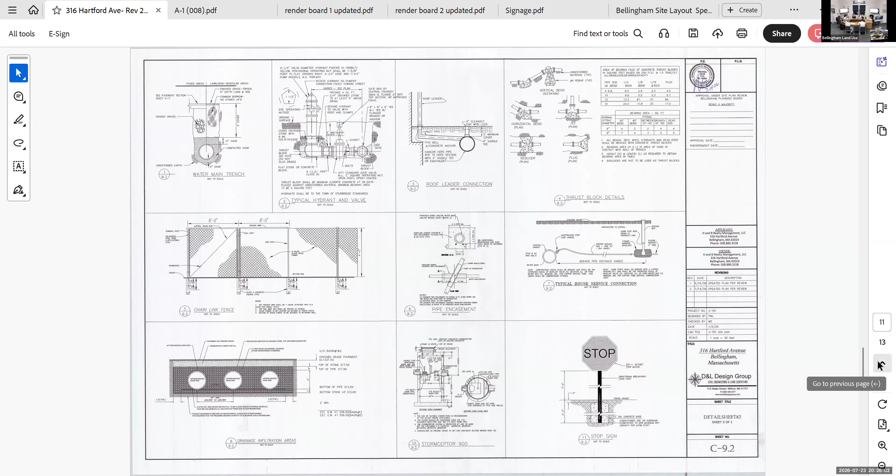The plan addresses a number of issues that Beals and Thomas raised, wanting to see a broader picture of the abutting properties, which the board brought up in the first meeting. You'll see that the parking area between the existing building and the proposed building doesn't actually look into the school area, as someone in the audience was concerned about.

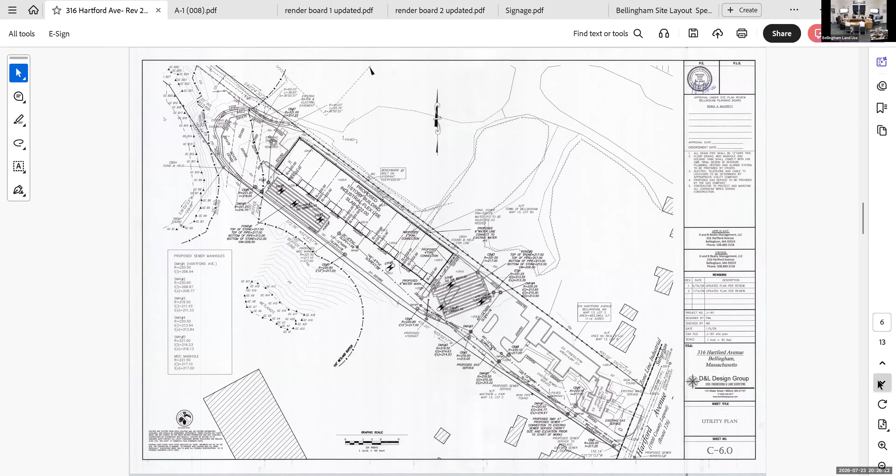That area actually looks into an existing DPW site where they do some work, and on the other sides of the DPW area it's just wooded area. So there's no concern about people parking and staring or looking in on the school and the children. The existing ball field, which I don't even know is still in use for Stall Brook, is at the very top of the plan.

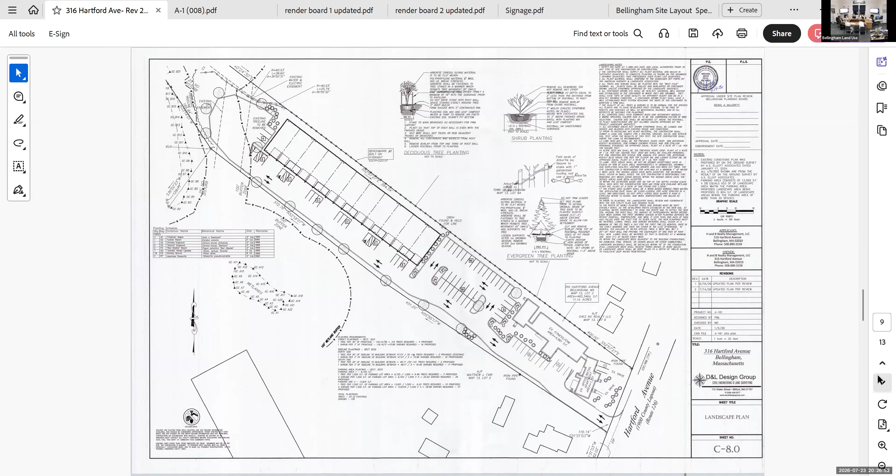You'll see the wooded area, the existing gravel area, the wooded area, the existing gravel area, and beyond that the baseball field, which is at the very northwestern edge of the building.

You were concerned at one point about where the town well area is. If you look at the first page of the plan, it shows that at the very western edge of the property, the circular areas being the 400-foot radius around the wells. That is nowhere near where we're proposing anything, nor is the gas easement at the rear of the property. We're not coming anywhere near that.

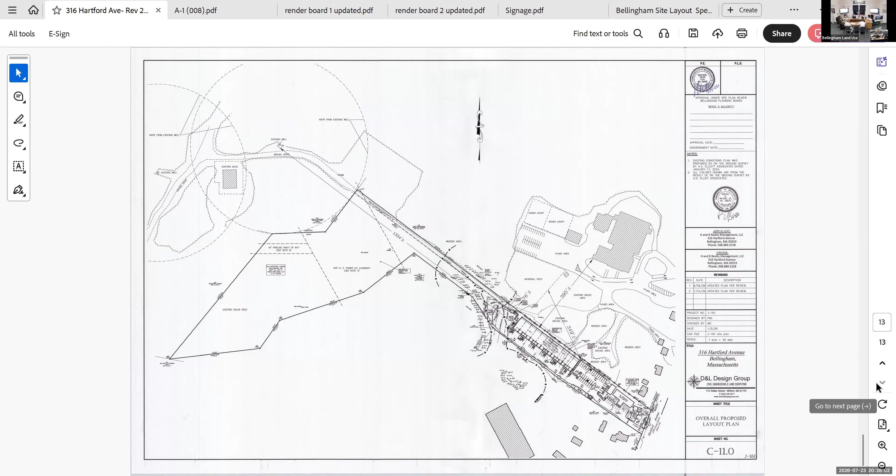Despite the fact that the parking area doesn't look into the school area, there is a fence proposed along the back of the property. We also have renderings of the building with different views, including a back walkway view, showing there would be a walkway behind the building. That's up on the board there, the back corner.

And then there's also a street view and front view of the building.

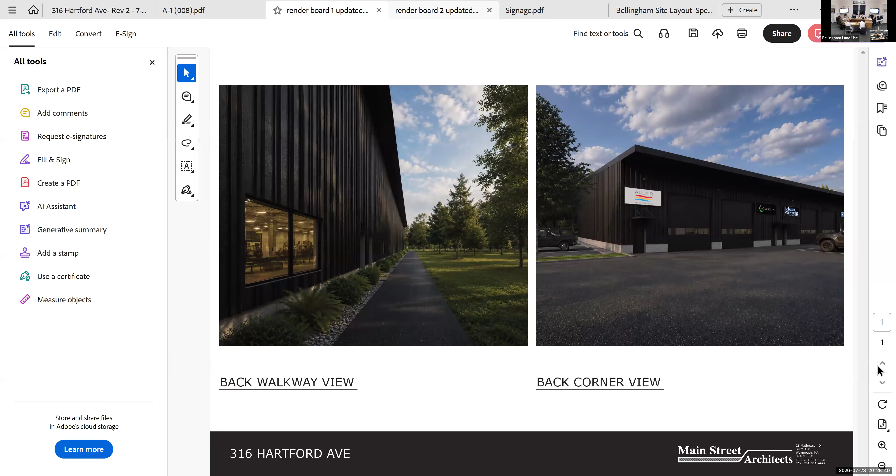One of the issues at the very first meeting was regarding signage. There's an existing sign at the property - if you look at the screen now, the left-hand picture shows how it is today. What we propose is just putting a pedestal style sign that references the building, with no tenant names. Signage for any tenant would only be contained on the front of the building itself, as you can see in the other renderings. So it would be a rather small sign overall, with no references to tenants - just the name of the proposal, the park, and the address.

I think that more or less covers most of the comments from the very first hearing, as well as from the technical meeting held with the fire chief and building inspector.

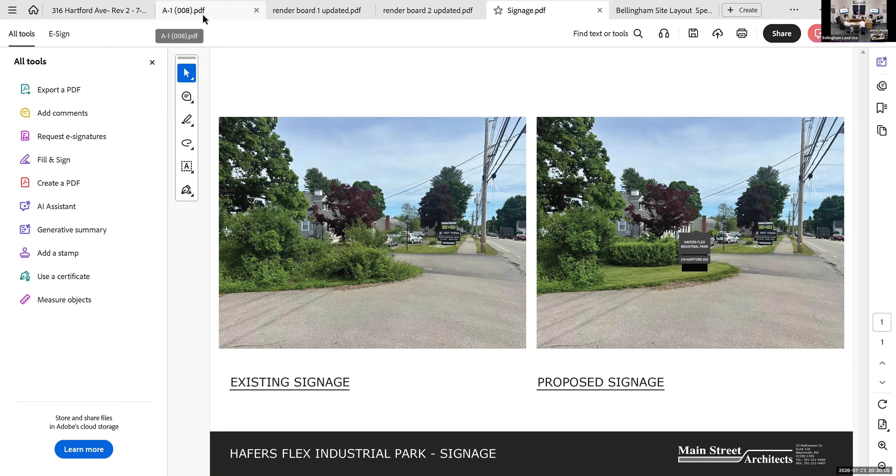There were some concerns brought up about traffic going in and out and doing a traffic analysis. I understand the concerns, obviously. My opinion on that is that 126 is already a busy street. The traffic on that street is there and it's not going anywhere. It's also a roadway that has already been heavily analyzed over the years.

You have before you the project at the intersection of North Main Street, which has had a traffic study done. The state has the proposed redevelopment of that section of Hartford Avenue and the bridge. Traffic has been analyzed at the intersection of the Market Basket Plaza and the Charles River Plaza with the Whole Foods and the theater. You've recently had a decision and a proposal a little further down on Hartford Avenue, I believe it's 455, a similar type of construction, smaller than ours, but there was no traffic study requested or required on that, to my understanding.

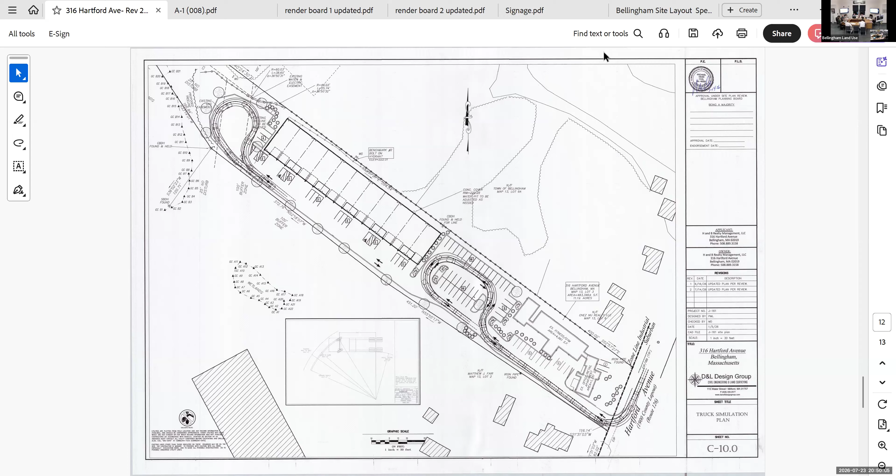I also want to remind the board that we do have Beals and Thomas, Matt Cody. I was just going to say, Matt, have you had a chance to look at the submission from July 14?

For the record, Matt Cody, Beals and Thomas. No, we have not - we only received that last week. And as discussed with Rachel, similar to the previous project, our budget had only carried us to a supplemental review, and this would be a second supplemental review. I was able this afternoon to breeze through it quickly in preparation for tonight. There were a handful of items that were outstanding. Some of them seem like they've been addressed in part, some technical and some administrative, but we haven't delved into it in any great detail yet.

Can you prepare an estimate for the second supplemental and provide it to us?

Absolutely. Okay, and we'll pass that on once it's in, because there are some open items, and I know some of it you haven't done on plans yet because you haven't finished. We were waiting, right, exactly. So I think we need that.

Is there anyone here in the audience that has any questions? Sir, if you could stand, and give your name and address. Yeah, my name is Doug Kelly and we live at 319 Hartford Ave.